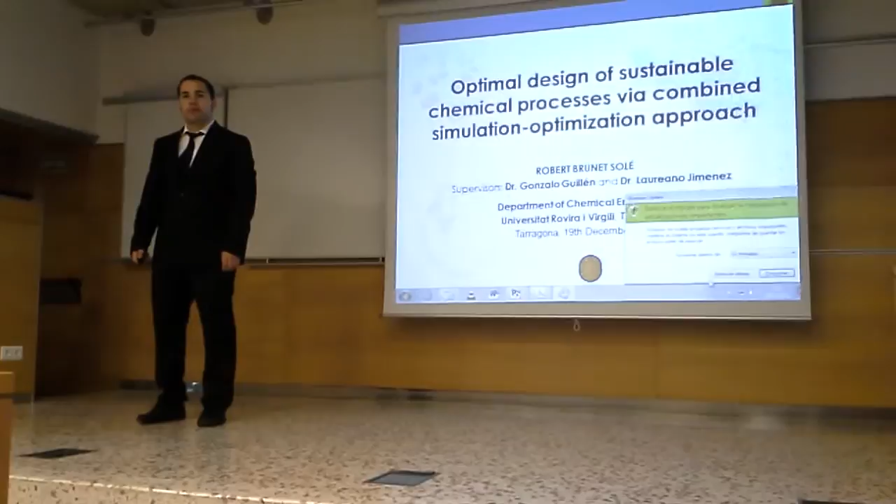I divided the presentation in 5 blocks: the introduction, the bioprocesses, thermodynamic cycles, biofuels, and finally the conclusion. In the introduction, I will present the aim of the work, the main objective, and the background of my thesis. The traditional performance in process system optimization was to reduce costs or maximize profit. However, nowadays, a new trend is to also reduce the environmental impact. Therefore, we will focus in this thesis on reducing the cost as well as the environmental impact.

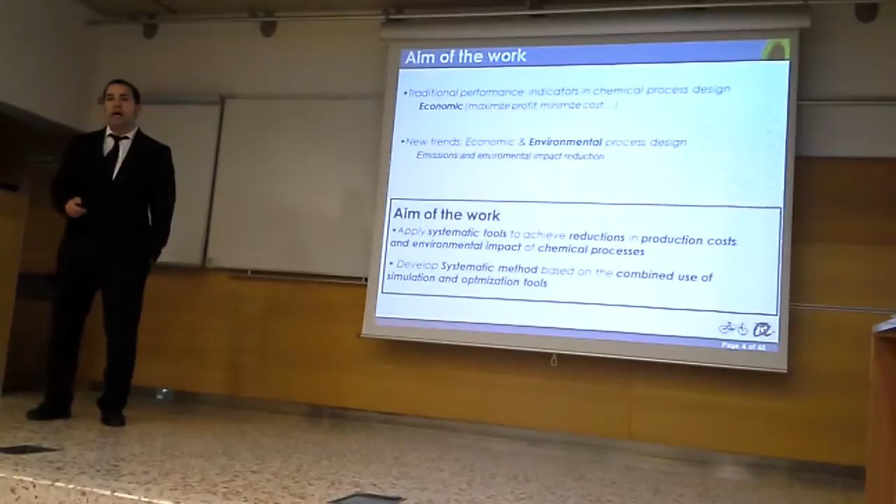The aim of the work is to apply systematic tools to achieve reduction in the economic and environmental costs of chemical processes and to develop a systematic method based on process simulation and optimization tools. The key bases of my research topics are the chemical process, which is the case study that we will treat. The economic evaluation and life cycle assessment are the indicators that we want to optimize, and mathematical programming and process simulation are the tools that we will use. All of this with a common objective, the multi-objective optimization for sustainable chemical processes.

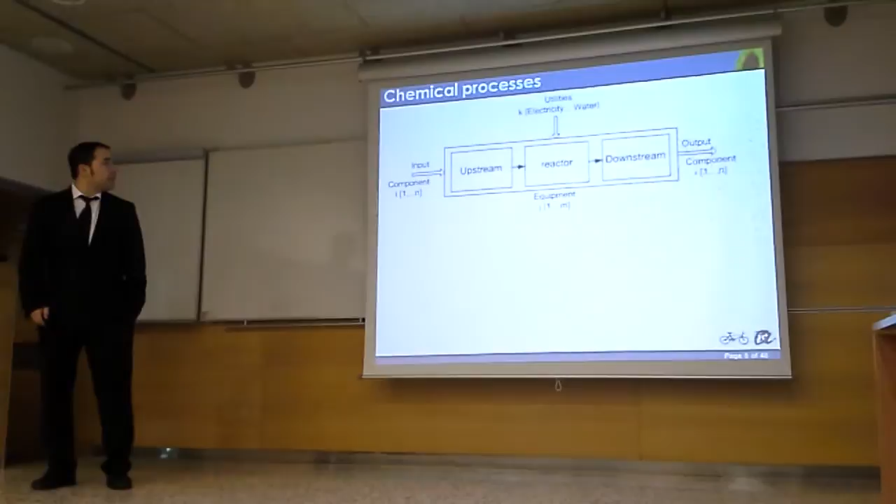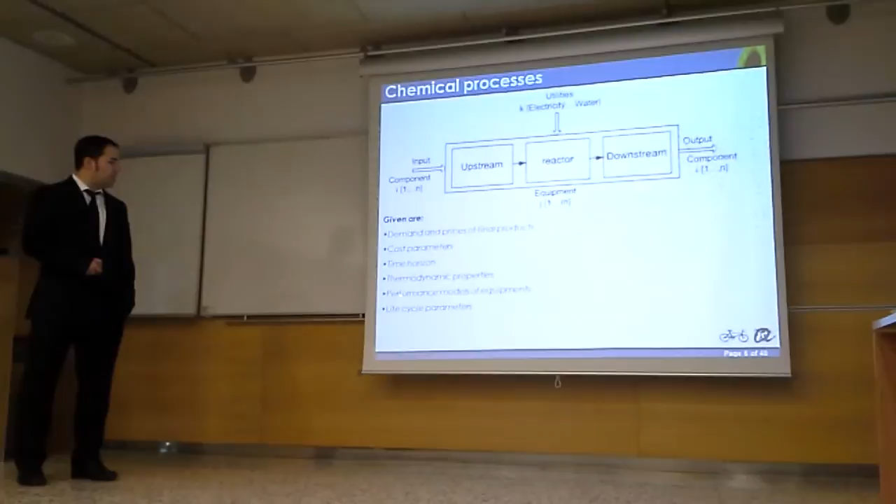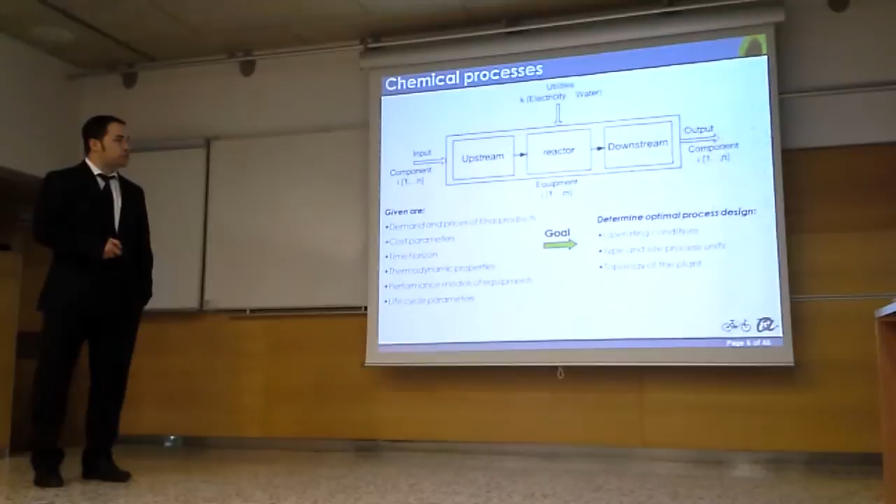Here we have a typical chemical process, and the problem is: given the demand and prices of final products, the cost parameters, the time horizon, the thermodynamic properties, the performance models of the equipment, and the life cycle assessment, the goal is to determine the optimal process design, which means the optimal operating conditions, the optimal type and size of units, and the topology of the plant. The first question is how to measure the economic performance. We use the conventional economic models, and in some cases we take one or other economic analysis. The net present value, the total capital investment, or the operating cost are used in this thesis.

And how to measure the environmental performance. This is newer, and we use the life cycle assessment from cradle to grave, following the ISO standards. The life cycle assessment is divided in 4 phases. Phase 1 is the goal and scope of the process. Phase 2 is the inventory analysis. Phase 3, the impact assessment. And phase 4, the interpretation of the results obtained in the impact assessment.

The methodology is expressed with continuous variables and is the sum of the direct emissions plus the waste generated plus the raw materials plus the operation phase and the construction phase. We use, in most of the cases, the Eco-indicator 99, which is divided in 11 different indicators or in 3 damage categories. The damage categories are damage to human health, damage to ecosystem quality, and depletion of natural resources.

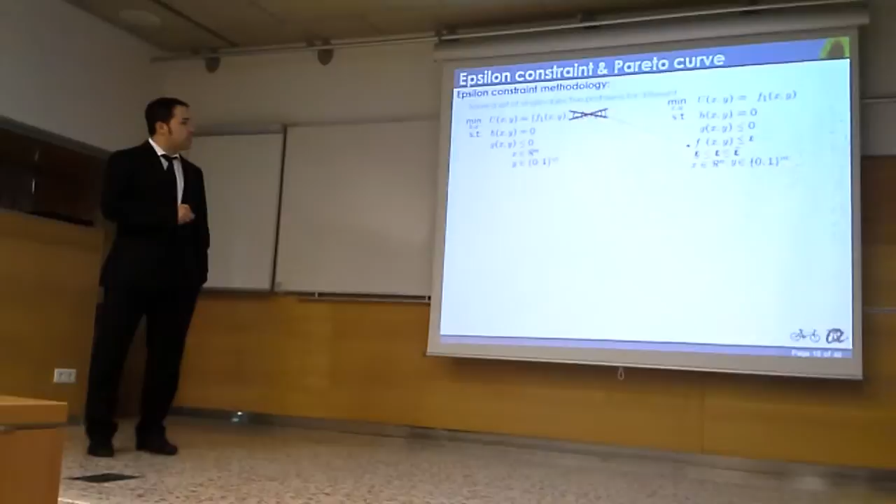Additionally, as we said previously, in most of the cases we solve for the economic and also the environmental indicators. Therefore, we have multiple objectives. How can we deal with multiple objectives? In this work, we use the epsilon constraint methodology. We have here the same MINLP as before, but with multiple objectives. What we are doing is taking one objective and passing this objective as a constraint. And then we create a new problem with a single objective.

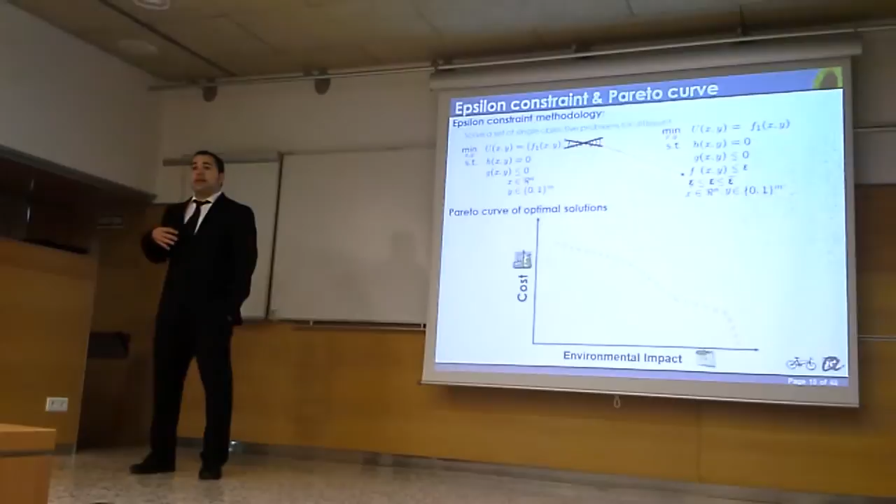Additionally, in most of the cases, it's not possible to obtain the minimum cost and the minimum environmental impact at the same time. So this is the minimum cost solution, and this is the minimum environmental impact solution. And we are calculating the optimal solutions between these extreme points. We'll explain in the next blocks how we calculate them.

Finally, the last slide of the introduction is why we are using simulation-optimization instead of the simultaneous approach. Because until now, chemical process optimization was based on the simultaneous approach, which means formulating an algebraic model in explicit form and solving it. In most of the cases, this work was done in GAMS or in MATLAB.

However, in process design, these models were shortcuts, were very simple. They could not describe very well what's happening in the plant. What we're doing here is presenting a sequential process simulator. It's more difficult to optimize, but we can apply the technologies that we have now and the speed of the computers, and now we can deal with these kind of problems.

Then here I will present more or less how it works. We have an MINLP problem. An MINLP problem, in most of the cases, you have to solve in two sequences. You have to divide the problem in an NLP, where you will take the continuous variables and the linear and nonlinear equations, and a master MILP, where you will have the discrete variables and linear equations, without nonlinear equations. Then we first solve the NLP.

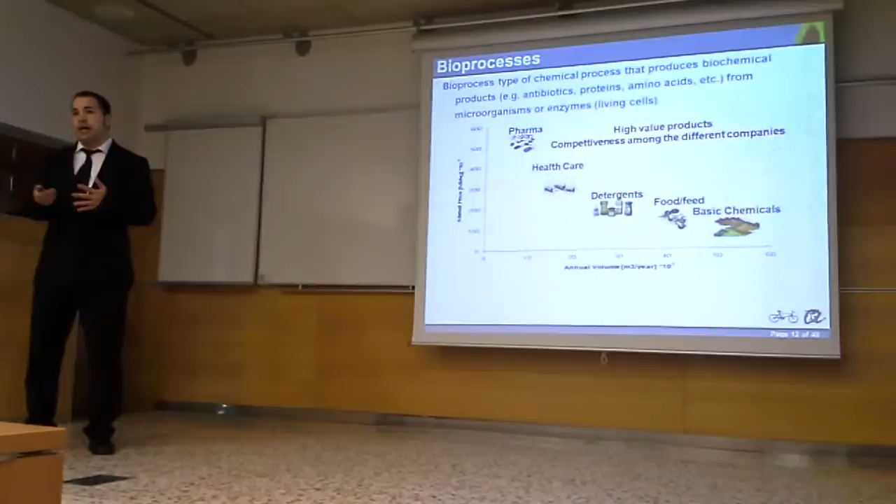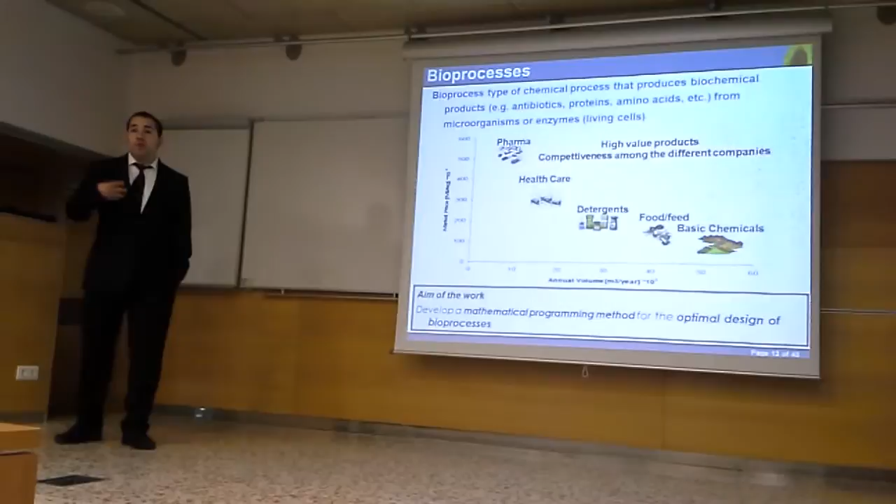The first question is why we chose bioprocesses as first case. Well, a bioprocess is a type of chemical process that produces biochemical products, antibiotics, proteins, amino acids, from microorganisms or enzymes, from living cells. They produce a high value product, and there is a lot of competition among the different companies in the prices of the product. Then there is a clear need to optimize their process to be more competitive in the market. The aim of the work here will be to develop a mathematical programming method for the optimal design of bioprocesses.

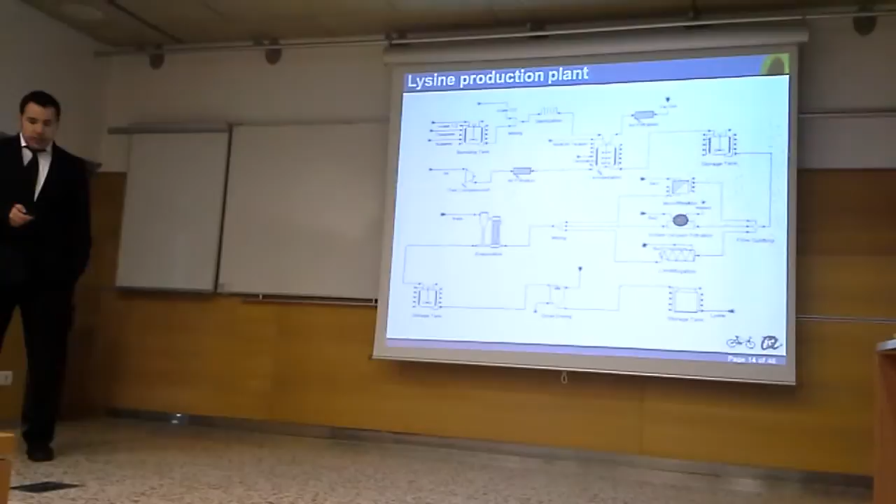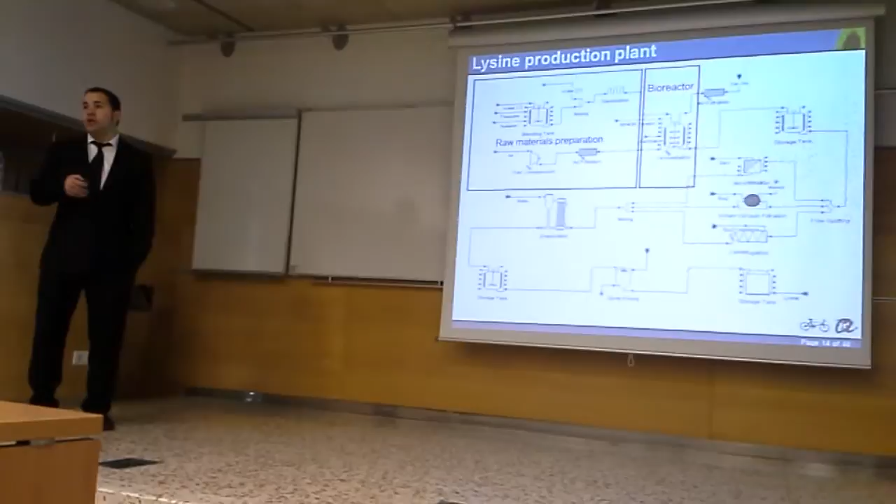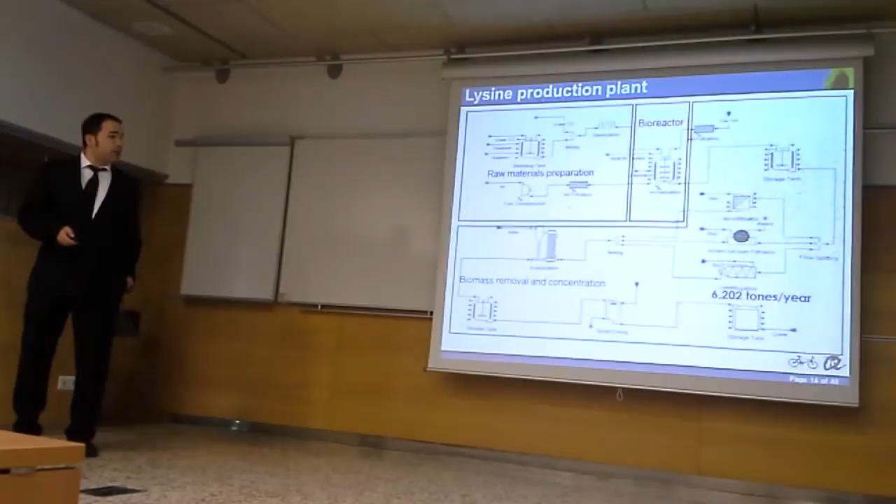The bioprocess that we took was lysine production. Lysine is an amino acid. This is a typical fermentation process. It's modeled in SuperPro, and we have the raw material preparation, where the main raw materials are threonine and glucose. We have the fermentation in the bioreactor, where glucose and threonine react to produce lysine and biomass, and we have the downstream, where the biomass and the water are removed from the main product, the lysine. The production of this plant is not high because normally in bioprocesses, for this type of products, they don't have a very high production.